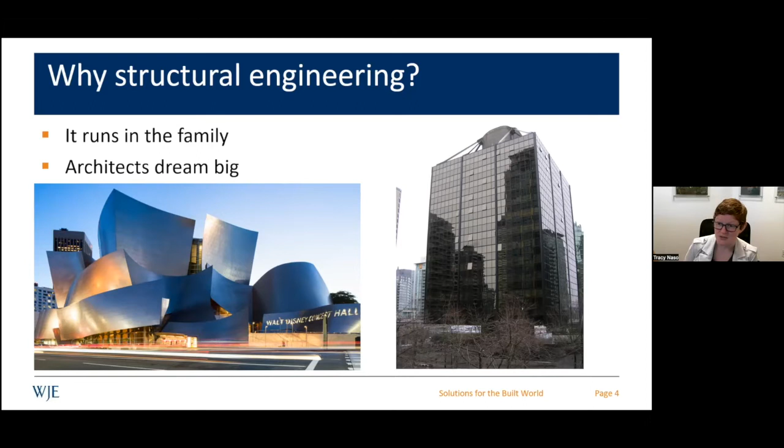But 9/11 actually happened when I was in high school. I was a junior, which I think is about where you guys are. It had a big impact on how I felt and thought about structural engineering - the social responsibility involved there, limitations, and then what to do with it. So it kind of gave me pause as I was heading into co-oping and then heading into grad school, and sort of feeling out a little more of what do I really want to do?

I was drawn to history and preservation. So you see these amazing Gothic cathedrals in Europe, and a few that are trying to do it in the US - they don't do a bad job. But also some engineering failures, which is scary, but very interesting. I will say it's a lot more of a head scratcher to figure out why something didn't go the way you thought it would.

Than starting out following some codes and provisions in a book in the initial design. So that kind of got me thinking and looking at some other things instead of just designing really tall buildings. Nothing against the designers, but there are other things that are pretty engaging out there.

Backing up a step, what is engineering? I went to the internet, and I liked dictionary.com's definition the best: engineering is the art or science, and I appreciate the art part, of making practical application of the knowledge of pure sciences such as physics or chemistry, as in the construction of engines, bridges, buildings, mines, ships, and chemical plants. I think that summarizes it well.

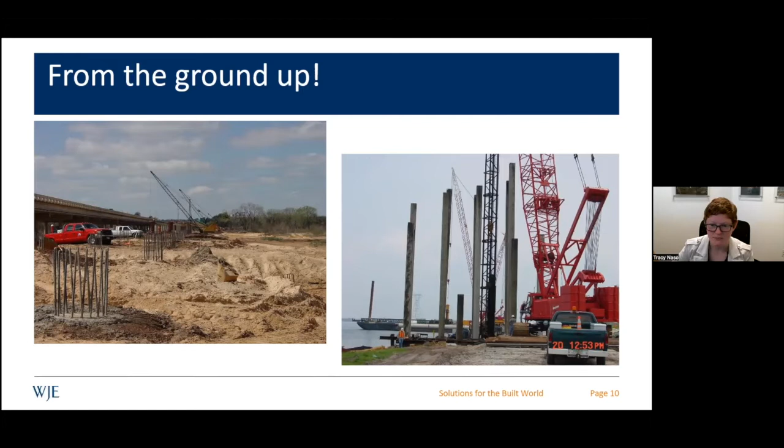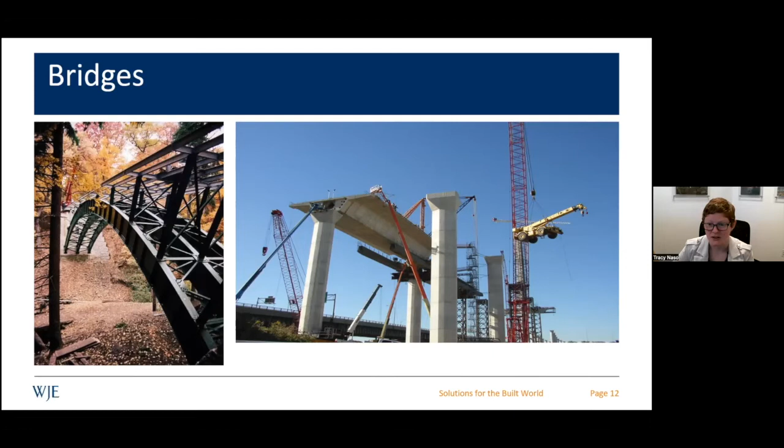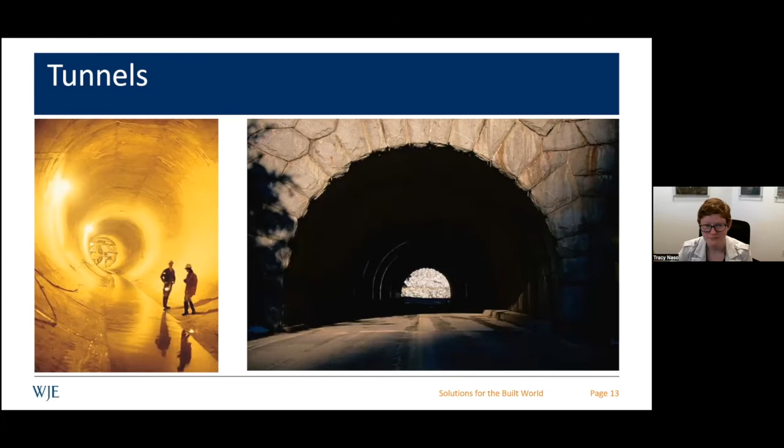Tunnels - kind of something we don't think about all the time, but extraordinarily important. Cool things like stadiums - the one on the left is Miller Park up in Milwaukee. Sorry to admit, I'm not sure which one is under construction on the right, I think it's in Phoenix.

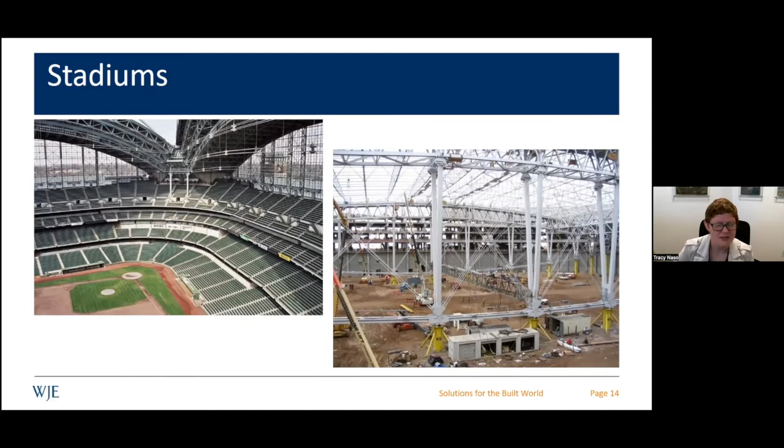Heavy civil comes into play, like dams, hydroelectric dams, power facilities, even the big towers that carry transmission lines. The structural engineer actually designs that - it's a specialty field.

And then more specialty structures - radio antenna, communications, shipyards, wharves, very heavy specialized objects.

So a lot of times when you say, are you interested in going into engineering? What does that mean? A lot of times it's a basis of kind of interest in all of these: drawing, math, technology, science, problem solving is a big one, construction. But it really touches on all of these, so it's not just narrowly picking one. It's really an interest in all of these traits and commonalities that all play into engineering. That's one thing that I liked - we get back to that practical application of concepts.

So if you are interested, usually that looks like a science focus in high school - math, science, computers, if there's a CAD class offered. Sometimes there's even research positions available to high school students in coordination with local universities. In college, usually major in civil engineering.

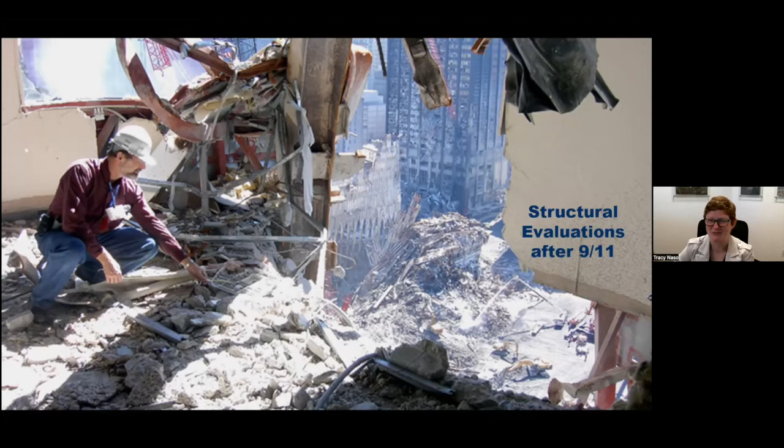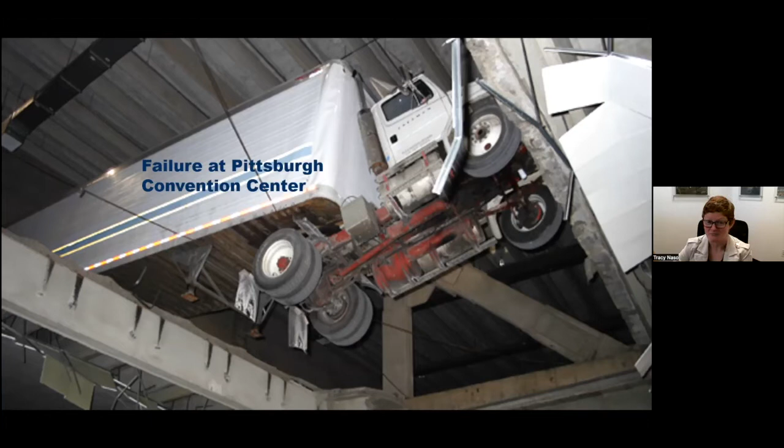Hurricane Katrina. This was actually one of the first projects that I worked on when I started with Janney. I ended up going down to Gulfport, Mississippi, looking at partially collapsed structures. But we looked at wind assessment, partial damage, full damage, complete devastation. We looked at a lot of concrete pads that used to have a house on it. Thankfully, we were able to get some GPS units to confirm, because there was no address anymore.

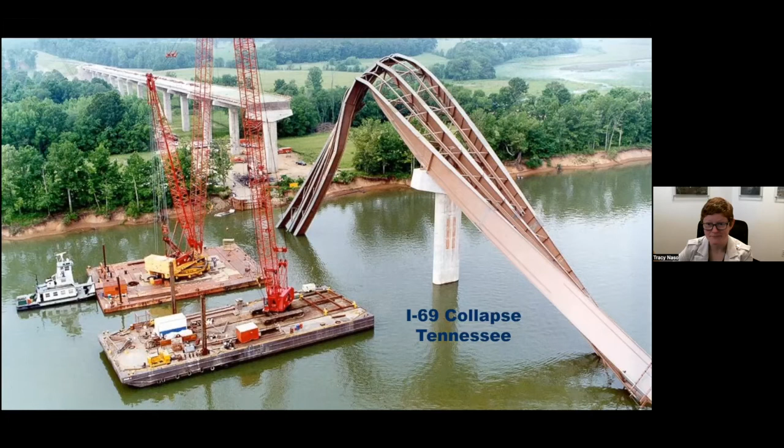Bridge collapses. This was a bridge under construction. The girder rolled, took the whole thing down. More construction accidents.

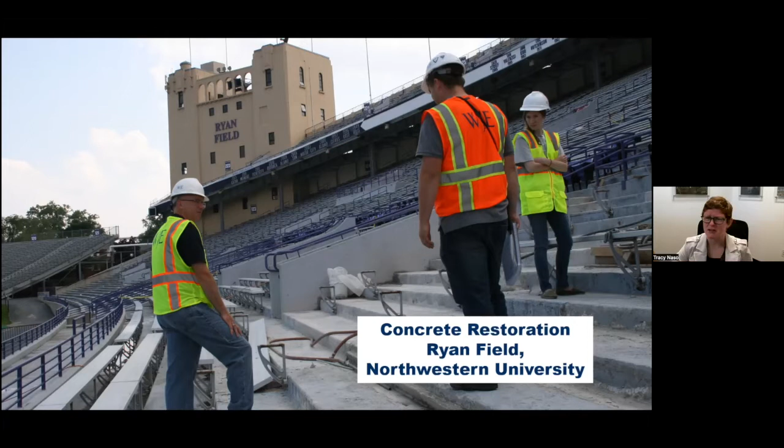Same thing, we did a big project at Ryan Field in Northwestern University. Historic, the oldest parts I think are from, I want to say the 1920s, maybe 1940s. Plenty of use left in it, just needs a little love. Kind of a cool project.

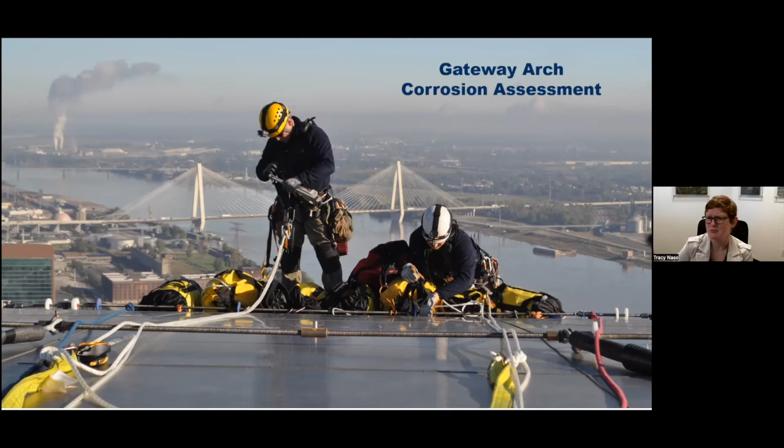Another cool one, we got to rappel off of the St. Louis Arch. It's made of stainless steel, but there was some weird staining on it. So we got retained to help figure out what and why, and what do we do about it, and if it's even important. Turns out it wasn't. But yeah, it's pretty cool.

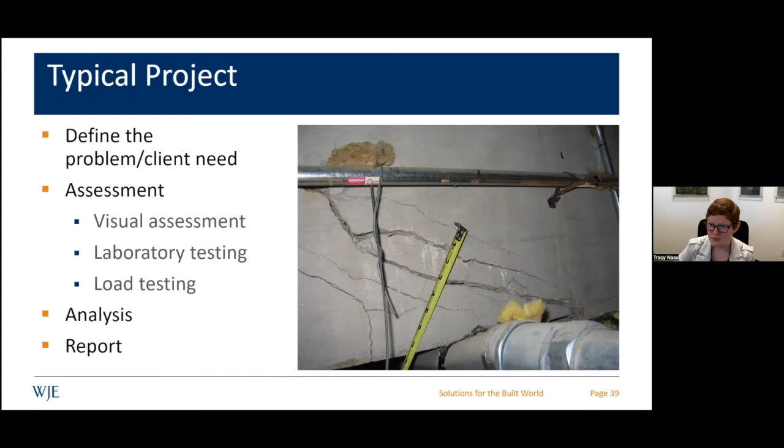Then we can develop a report to communicate our findings and recommendations, and that typically ends up going into some sort of repair design. So we'll develop repairs and specifications, and then construction. It's kind of fun because I get to see it from the very beginning, and then follow it all the way through, including working with the contractor and getting to see my design or repair implemented and the finished product.

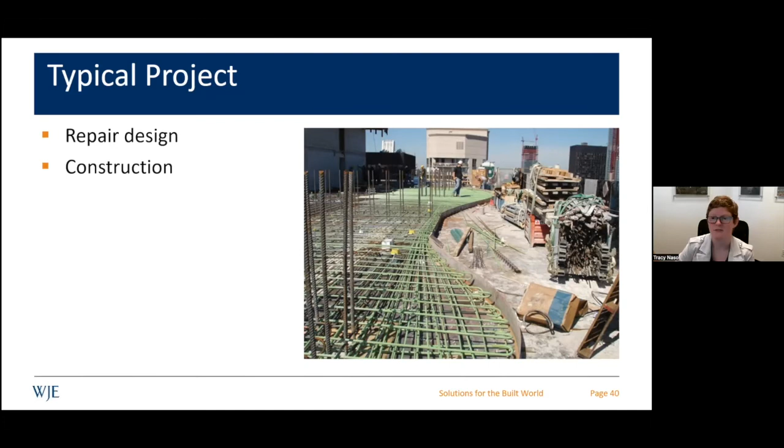So we were able to do a bit of laboratory study of the concrete, look at the staining, look at the chloride levels, and then develop a few options for the government on how they want to treat it. Do they want to restore it to use? That would actually influence what the decision is. If they just want to look at it and keep it from falling on people, that's a different decision. So that was really fun, to work on something a bit out of the ordinary and have some input on how we can keep it available for everybody to enjoy.

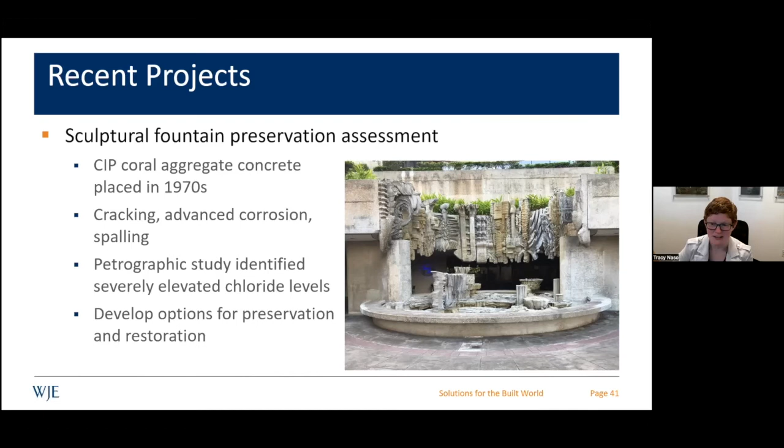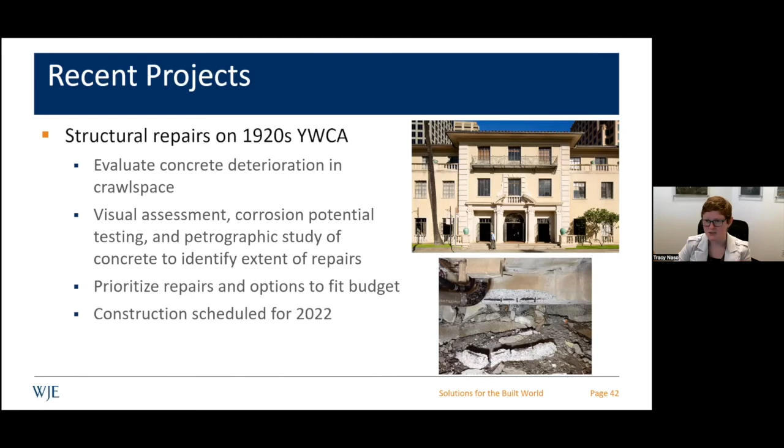So a lot of concrete, lots of spot repairs, complete repainting. They actually finished up this work last summer and the building is beautiful. All new sliding glass doors on the balconies, all new guardrails. And then this was actually coordinated with a full gut rehab. So the whole thing is really gorgeous. If you get to go out to Turtle Bay, it's pretty swank.

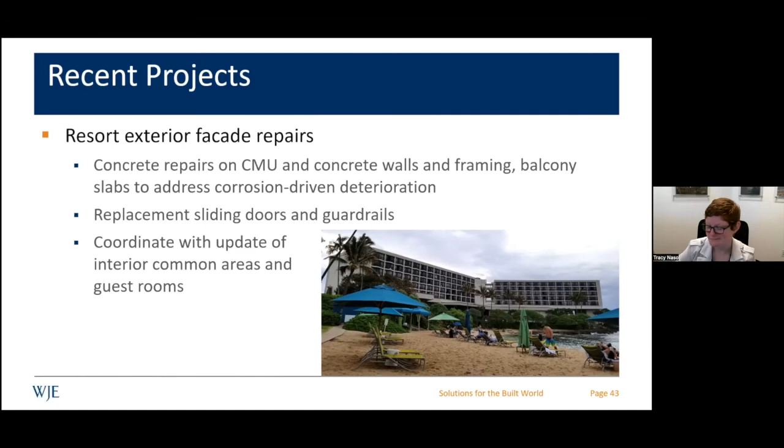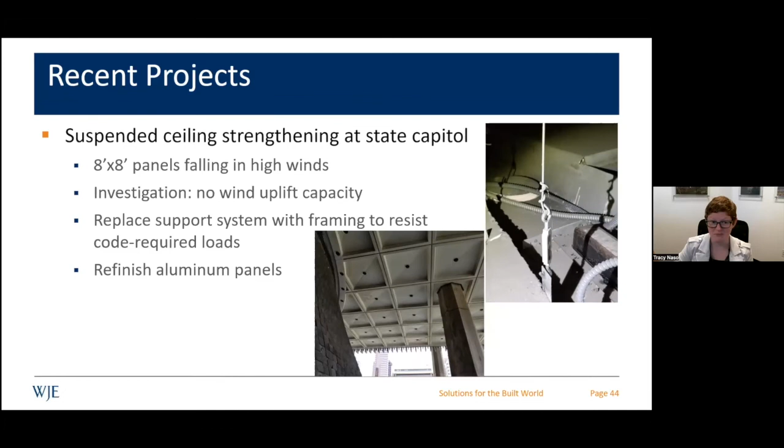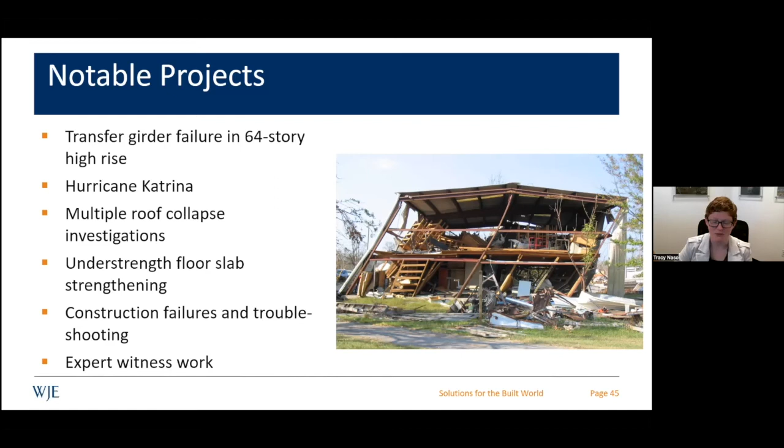So what questions do you guys have?

Yeah, wow, that was really interesting, at least to me. It seems like you got to go to really cool places.

So try to find companies that work in Hawaii, because there's a lot of stuff going on there, or by the ocean. Salt water messes stuff up. So there's gonna be jobs there.

Do you guys have any questions?

How would you rate the working environment for a typical structural engineer, or at least in WJE? Could you hear that? I think I heard that, but can you repeat it? How would you rate the working environment in a company like yours? Is that okay, do you need clarification, or does that make sense? Yeah, what if you don't mind? What do you mean by? I just mean your workplace atmosphere, and I suppose your stress levels, or the relationship you have with your coworkers. Okay, that I can get.